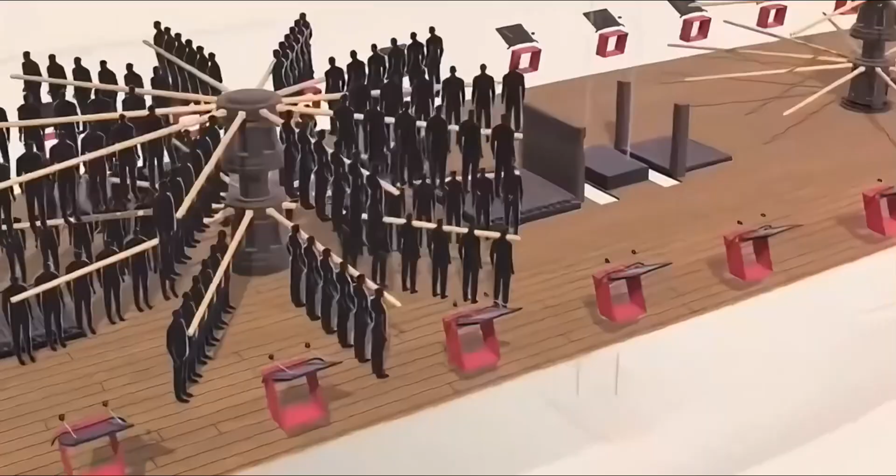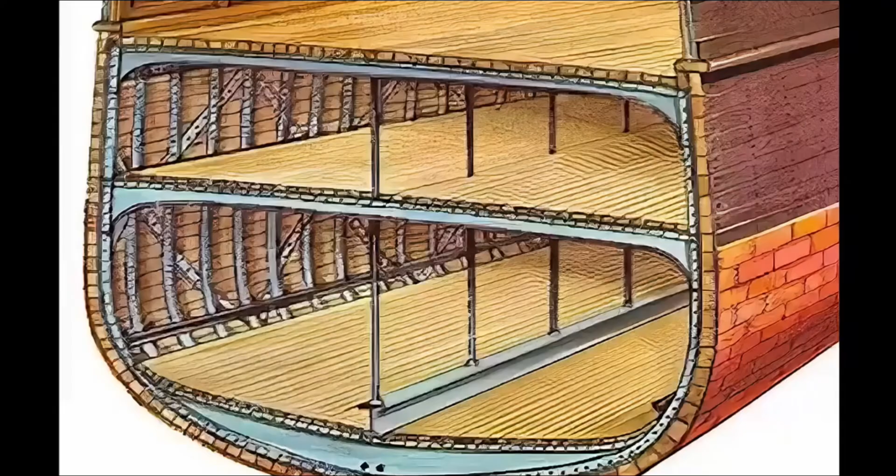The Victory, a grand sailing ship, sits peacefully in the harbor. On board, ropes, pulleys, and winches dominate, using the principles of leverage to reduce force to a level that human strength can manage. Sailors work together to operate this 3,000-ton giant, making it a marvel of its time.

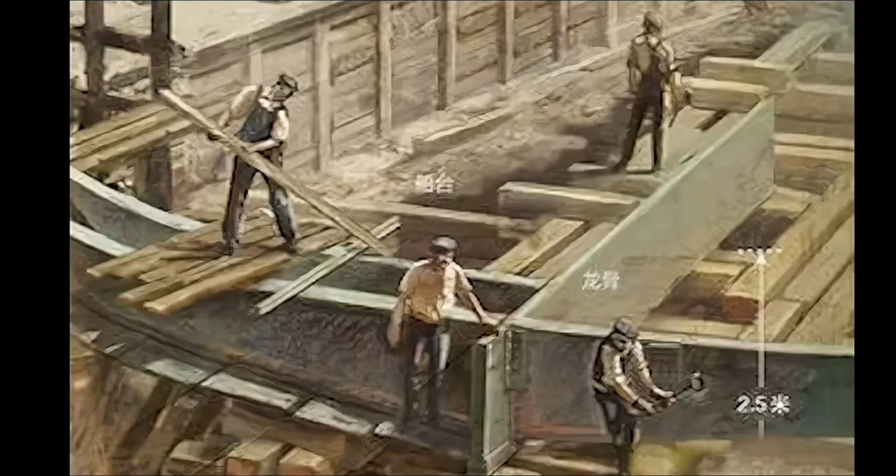Then came the steel era, and ships began to evolve. At first, only the frame was replaced with steel, creating semi-ironclad ships. These sleek, swift vessels reached the peak of sailboat design in terms of speed and aesthetics, but after the era of paddle wheels, steam, and hybrid propulsion systems, the propeller, high-pressure boilers, and multi-cylinder steam engines emerged. Sailboats were on their way out.

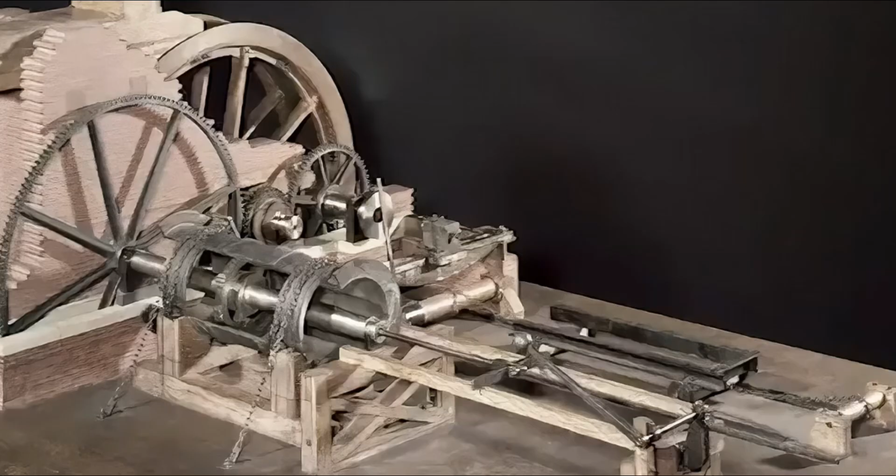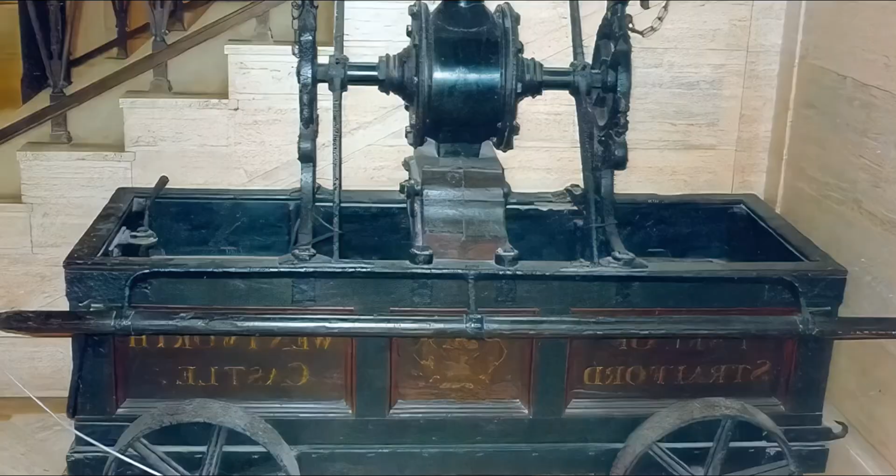People dreamed of building bigger ships, but 3,000 tons was the limit of human-powered construction. Iron anchors, keels, and engine shafts were so massive that moving them, let alone processing them, was a challenge. The need for more powerful shipbuilding tools became urgent.

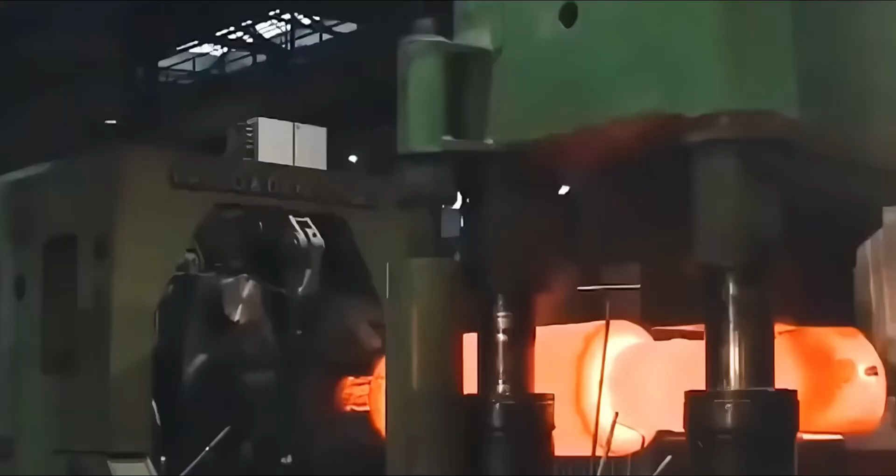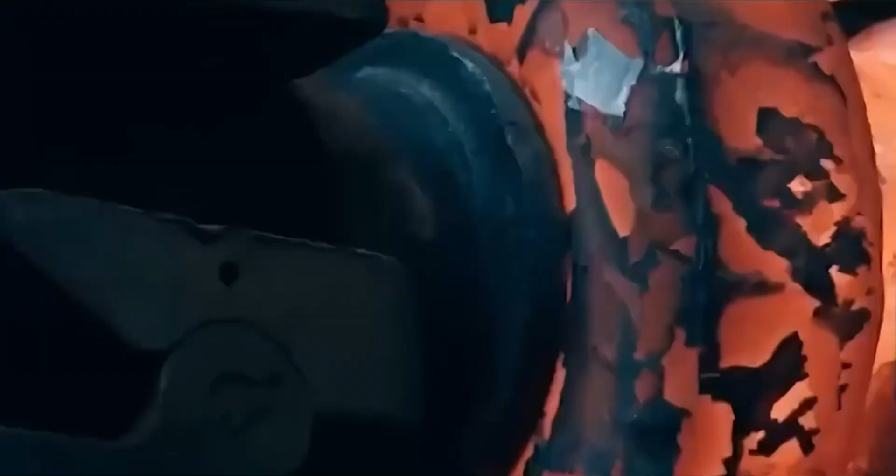In 1648, French physicist Blaise Pascal founded hydrostatics and proposed the principle of the hydraulic press. He conducted the famous barrel experiment, where just a few cups of water in a thin tube could crack a wooden barrel. But poor sealing technology kept hydraulic power, a sealed giant, locked away.

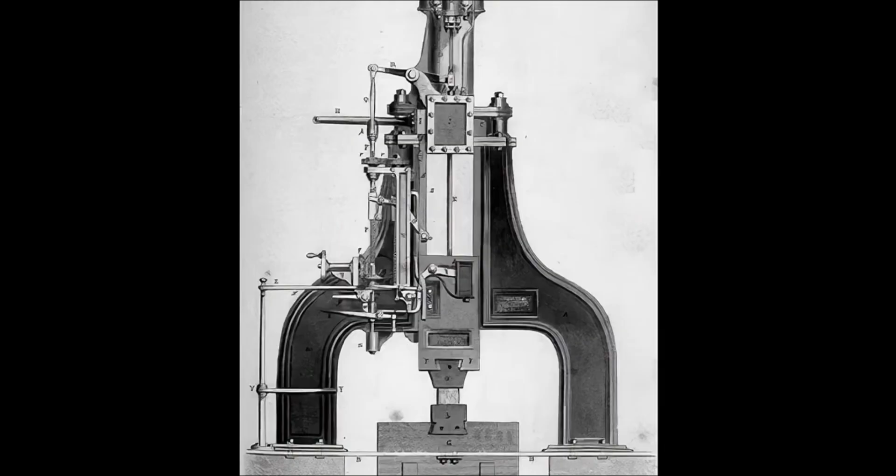Fast forward to 1775, when arms manufacturer John Wilkinson used a boring machine to create precise cylinders, solving the problem of piston leakage. This breakthrough helped perfect the steam engine and marked the beginning of hydraulic technology.

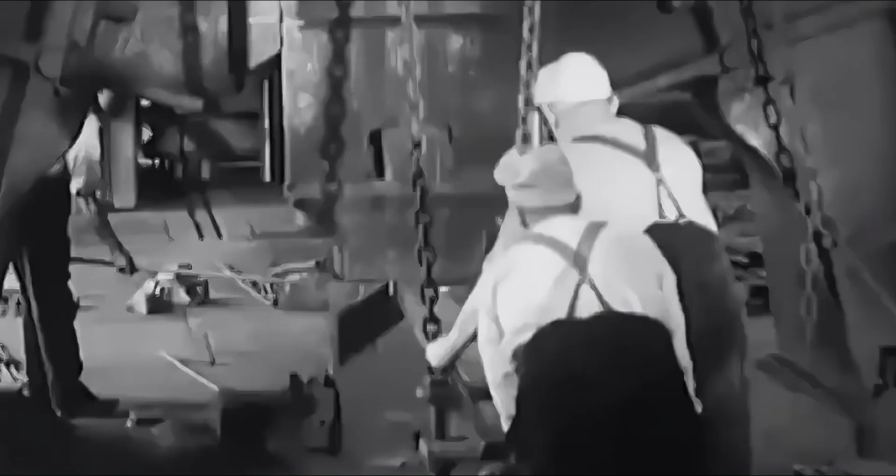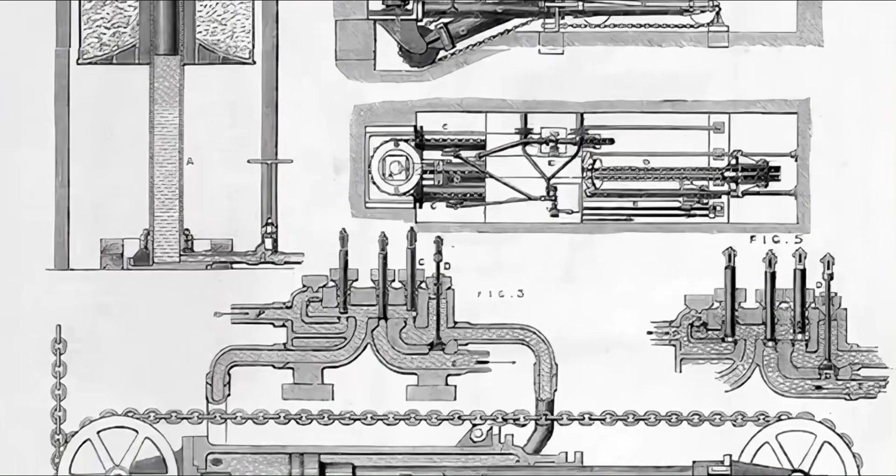Inventor Joseph Bramah, 12 years younger than Watt, made significant contributions. He worked on everything from toilets to printing presses and ran the largest lock factory of his time. In 1795, alongside his brilliant apprentice Henry Maudslay, later known as the father of machine tools, Bramah improved cylinder designs, using rings to enhance sealing and creating the first practical hydraulic press.

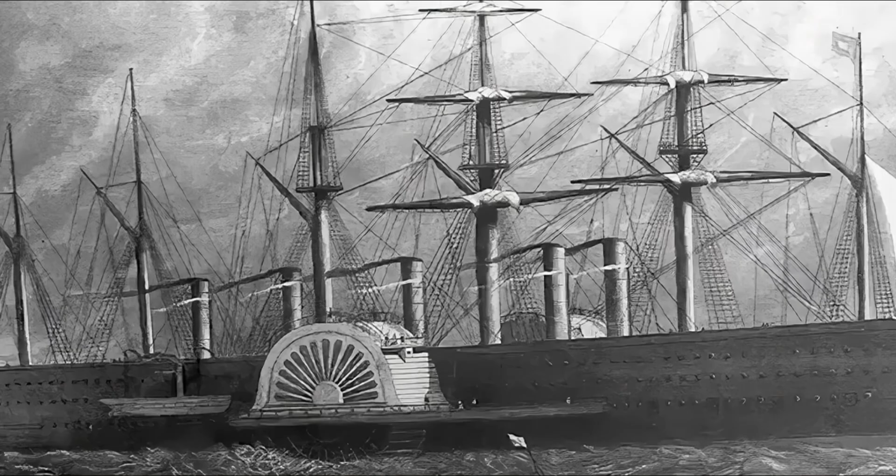Initially used for oil extraction, these presses grew larger and became essential for shipbuilding. Hundreds of tons of steel could now be shaped like dough, making hydraulic presses a cornerstone of the aviation, shipbuilding, and machinery industries. In 1961, China built its first 10,000-ton hydraulic press, a monumental achievement. By 2006, China had built the world's largest 15,000-ton hydraulic press, setting a new record.

Before hydraulic presses became huge, large forgings were made by hammering. After Maudslay's death, his apprentice James Nasmyth took the lead. In 1839, faced with the challenge of forging a nearly 1-meter diameter engine shaft for the SS Great Britain, he invented the steam hammer. This monster could deliver earth-shaking blows, and soon steam hammers became common until large hydraulic presses replaced them.

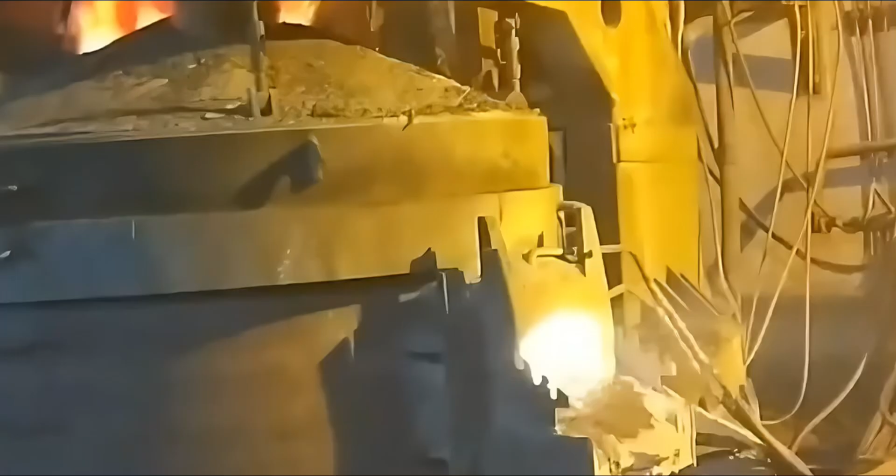Meanwhile, as Newcastle's docks bustled with coal, cotton, and tobacco being loaded by hand, William Armstrong invented the first hydraulic crane in 1845. Using high-pressure water piped from a nearby reservoir, twisting a valve could drive a piston to lift heavy cargo, a black magic invention that revolutionized shipbuilding.

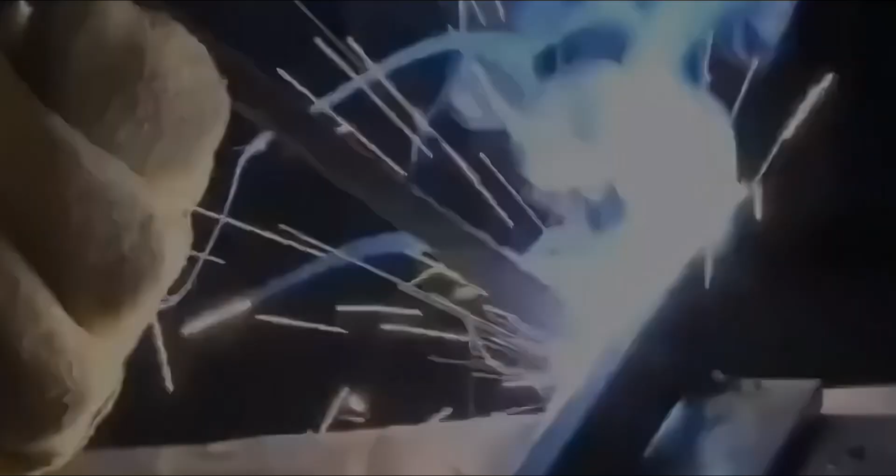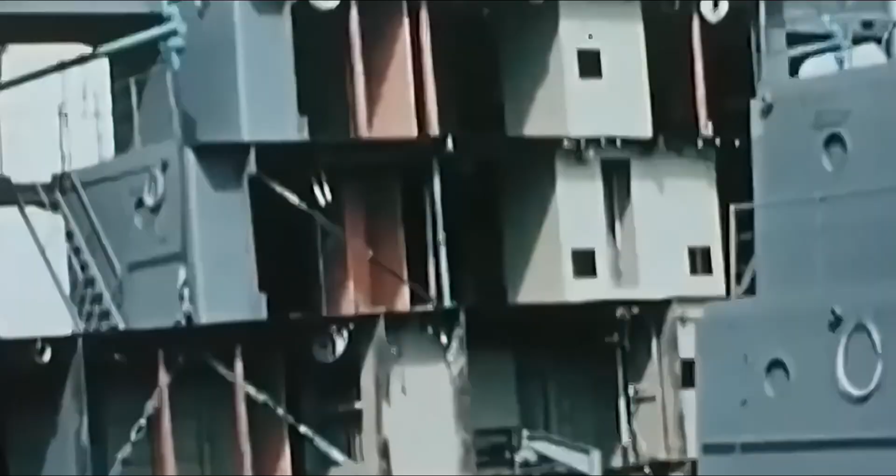By the late 19th century, as material calculations, riveting techniques, and corrosion-resistant iron improved, the foundations were laid for building massive ships. This marked the first revolution in shipbuilding, ushering in the era of steel giants and naval supremacy. But riveting had its flaws. In 1912, when the Titanic hit an iceberg and sank, it was revealed that weak rivets contributed to the disaster.

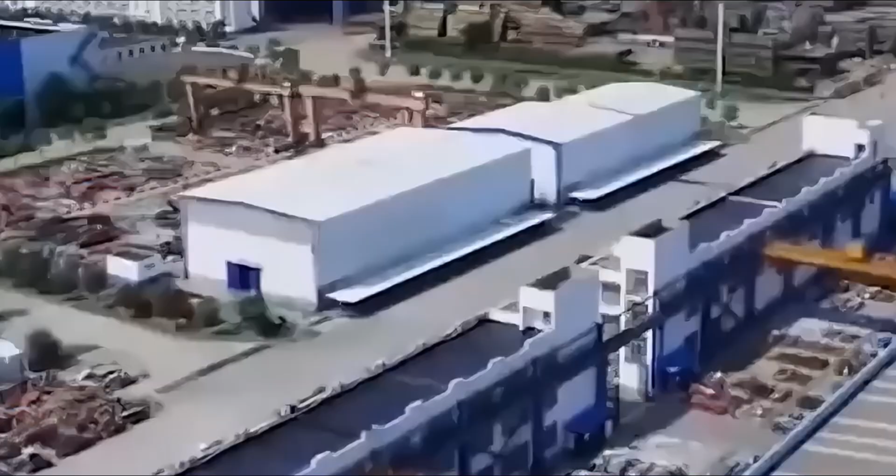Post-war, nations began to limit naval tonnage, and rivets, being heavy, were the first to go. Welding technology took off, thanks to the discovery of the electric arc and acetylene gas, which allowed steel to be melted or cut with ease. By World War II, modular construction and welding replaced traditional methods, drastically improving efficiency and cost-effectiveness.

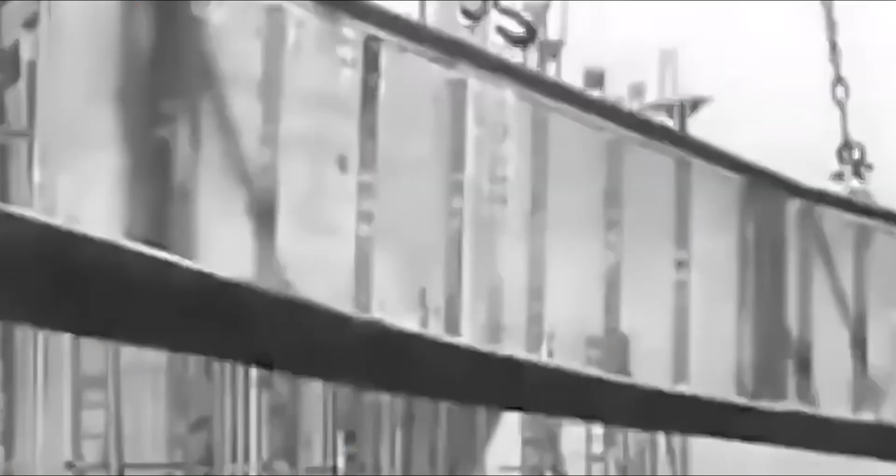Ships were built in sections, assembled quickly, and launched in record time, 42 days per ship, sometimes just 4 days. This innovation ensured that more ships could be built faster than they could be lost, playing a crucial role in the war effort. The third revolution in shipbuilding was led by modular construction and automation, transforming shipyards from labor-intensive hubs

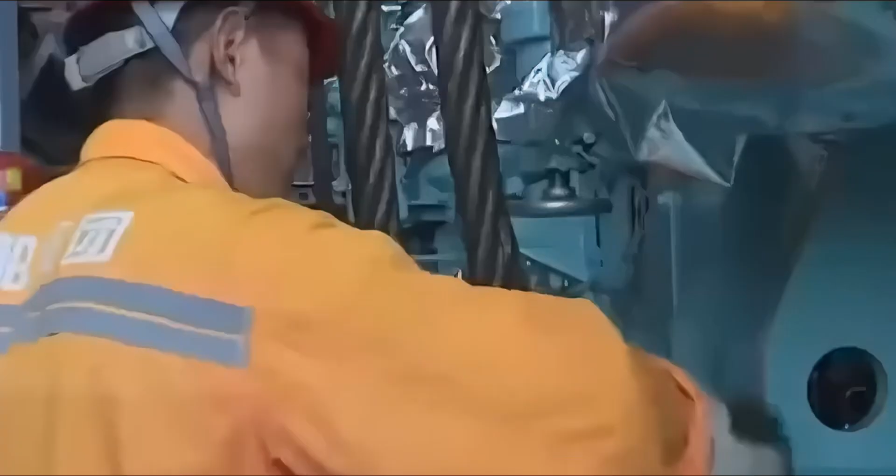to equipment-driven factories. Today, the shipbuilding industry thrives globally, with Asia at the forefront. Advances in technology and efficiency continue to drive the industry forward, ensuring that shipbuilding remains a cornerstone of global trade and innovation.